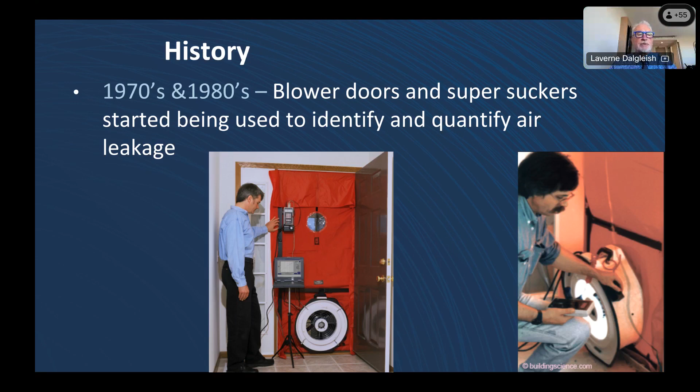When ABAA got going in the United States was in 2000, 25 years ago. There were really no guidelines or anything. So we had to do a lot of things. Probably the first thing we had to do is say what were the performance requirements from the materials to the accessories, the components, and then the whole buildings. And as we look at these today, they're very, very loose compared to what we're doing now.

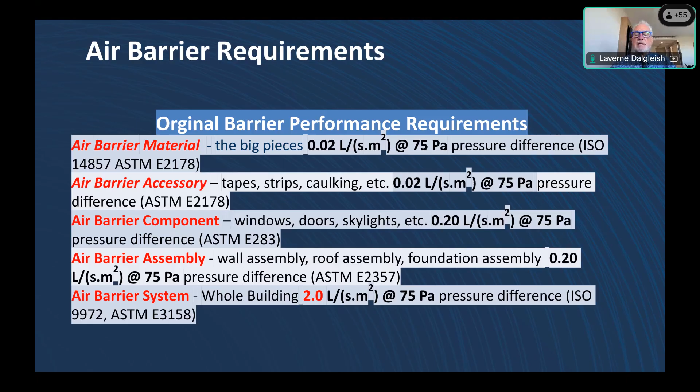Where a whole building in those days was thought to be tight at 2 liters per second at a pressure difference of 75, today we're getting down to 0.5 and less with normal testing out there. So that's a good thing. We're moving forward. And we had the various systems out there. And we had to also deal with even the materials.

And I show this because a lot of times we are dealing with, well, my material's airtight, I should use it. So this is a test that I got done. And it was basically using peanut butter. And the whole purpose I was showing is that you have to have more things than just the airtightness of a material to work. And it actually did very good. It was 1/10 of what was allowed for the material, but then all the reasons of cracking and so on. So as an association, we had to even deal with material specifications and installation guidelines and everything so that we can get to the building so that they're worthwhile testing and would get some feedback there.

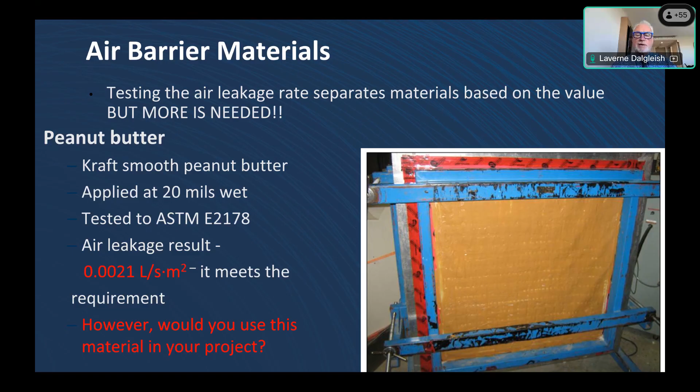The question I was asked all the time as I talked to code officials or government agencies or building owners was, especially on the code side, if we were going to make whole building airtightness testing mandatory, do we have enough people out there? And then everybody was asking, how do I know if the person I hire has the qualifications to be able to do testing? So that was the reason we took on a program to develop both a training course and a personnel certification program that met the requirements of ISO 17024, and we're an accredited certification body to deal with that program.

The other thing that was important was to be all-encompassing. So one of the things we did, and we take this through the training course, is this is all the different jurisdictions that are out there. What kind of testing do they require? What are the requirements? How do you prepare the building, et cetera? Because we wanted anybody that would be trained and certified to be able to work in any part of the United States or Canada.

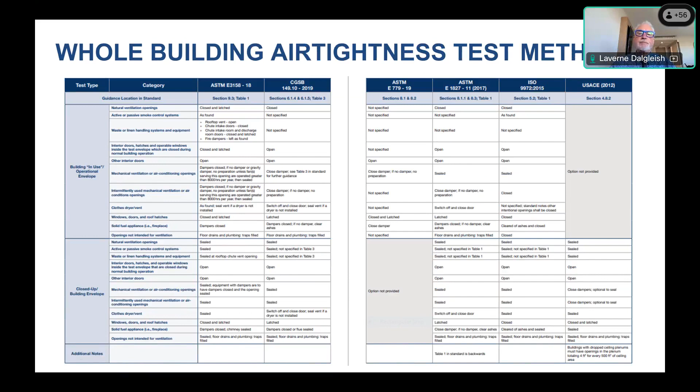The other thing that we wanted to have is a proper standard. The most common whole building test standard was ASTM E779, which was really good as far as the equations and the basics, but really lacked as far as how do you prepare a building and all the other details that can affect the outcomes. CGSB 149.10 in Canada took it a little bit farther. It got into more details on how to prepare buildings for airtightness testing, but was still lacking.

And about that time, the Army Corps of Engineers decided that airtightness of buildings was very important for a whole bunch of reasons, and security. And they asked us to help rewrite their protocol. And their protocol is half a test standard and half a materials project spec, I should say.

So we worked a lot of time on them to get it up to where we thought it should be. And when we were all done, we said, really, we have all the information that we need to do a proper whole building test standard. We just need to rewrite it in standard language, mandatory language. So we produced ABAA's very first standard on airtightness testing. That was back in 2016.

And then we took it to ASTM, which was the most prevalent standards development organization for this type of work. And we ran it through them, and it was published in 2018 as ASTM standard E3158. And it got into the types of testing that you would do and then how to prepare the building based on those steps and so on. So it was basically all the rules and all the guidance that you would need to properly conduct a test.

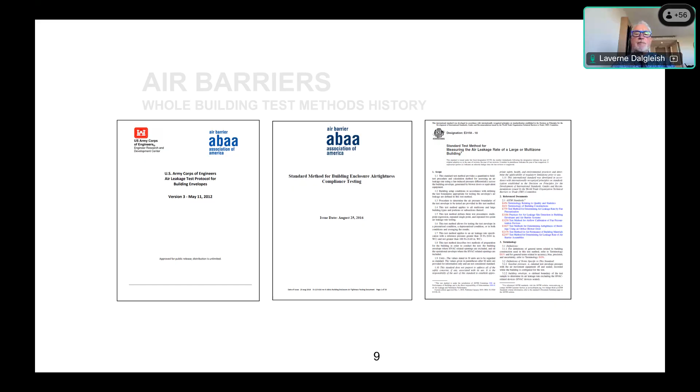And this is what we then took to building codes, for example, and had them update their requirements to allow the standard to be one of the ones that you could do. So we got into everything in that standard. We also looked at ISO 9972, that's in TC 163 SC1, I'm a member of, and we are actually updating 9972, but there was a lot of things lacking. We have a requirement to adopt an international standard if it's available and if it meets the purposes before doing a national standard.

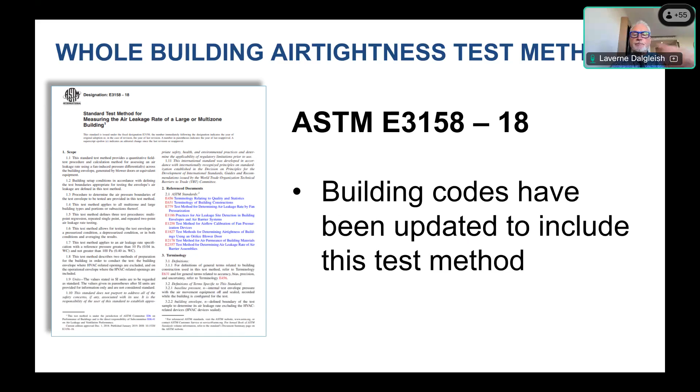Then we got into the qualifications for people performing the tests. And we, as a certification body, the very first thing we did, as anybody would do for training certification, is to identify the functions and tasks, and then the learning objectives of everything that had to be done from the time you start thinking about doing the test until you have a complete test report done.

And up until that time, the only qualifications that were out there, and it wouldn't be true certification, but the blower door manufacturers would produce training and give them a certificate that they attended the course. And then there were some organizations out there producing training more on single family homes than large buildings. And even though ASTM E3158 has large buildings in the name, everything can be applied to every type of building that's out there.

But in those days, this is going back again about 25 years, large buildings were really not tested, or there was probably, in my personal opinion, probably a dozen people in North America that could do the job properly out there.

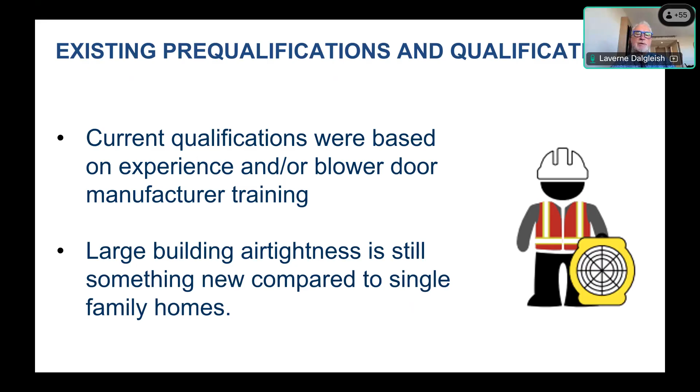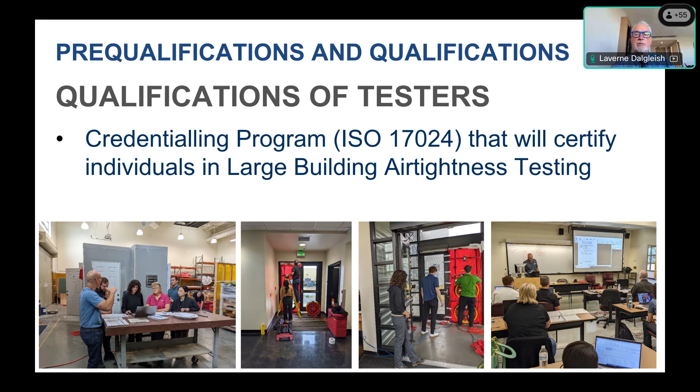We wanted to balance both. So we wanted to expand the pool, because that's the question, do we have enough people to be able to do whole building testing? And then we didn't want people that are extremely knowledgeable and know almost everything that they need to know to do the testing to have to go through the same sort of process.

So the training program is 5 days, and it's a little bit of a challenge to get people to go away from work for 5 days. But day 1 and day 2, you're basically in a classroom, although you are using some of the blower door equipment and so on. Day 3 and day 4 is really hands-on testing, using mock-ups, setting up the blower doors and everything. And then day 5 you actually conduct a whole building test. And we now deliver it in 4 different areas across the United States.

Our training programs are basically sold out as we put them. We still have a long ways to go if we want every building in the United States and Canada tested to get the people out there, but we are growing the business.

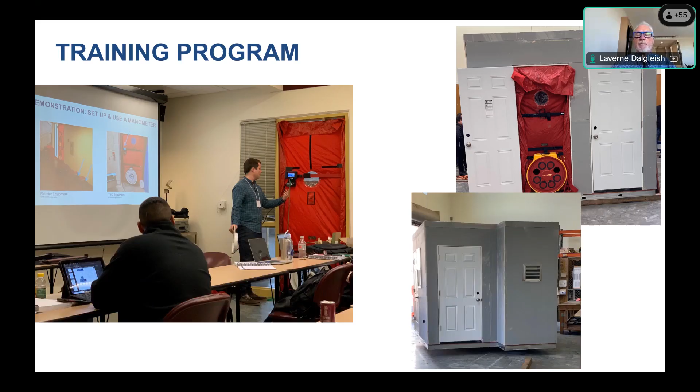Some training facilities have actually built a whole building within a training facility. It's a building within a building, has much more details and so on. And then this is an outline of our certification program.

So we have 2 levels, and level 1 we don't want to call an introduction because they would be qualified to do a lot of testing. And we do focus on larger buildings. So in level 1, you can very simply come to the 5-day training course, and you can then have a practicum exam, which is to take a building from 0, do all the preparations, conduct the test, do the report and so on.

Now, because you have a proctor there during that time, that is not a cheap way of getting your certification. So in track B, it's basically somebody that has experience, and they can give us test reports within the last 5 years. The surface area of the building envelope has to be a minimum of 2,000 square meters.

In both cases, they still have to write a 200 question exam. This is a written exam that deals with knowledge and skills, whether you're going track A or track B. And then if you go track B, instead of doing the practicum exam for the abilities, you would provide these reports. We have a checklist of about 20 items that the test report has to include, and we review each one of those.